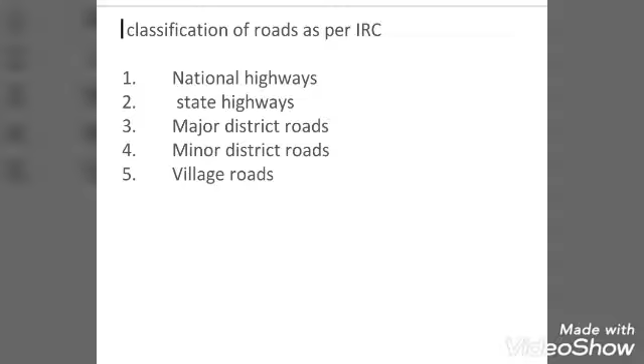Then State Highways SH. State highways of the state link district headquarters and important cities within the state and connect them with national highways or highways of the neighboring state. They are financed by state government, construction and maintenance by roads and buildings department.

So here, 20-year road plans, their targets and achievements. Serial number, category, first 20-year plan, second, third and fourth 20-year plan. The first 20-year plan is 1943 to 61, second 1961 to 81, third 1981 to 2001 and fourth 2001 to 21. According to the Nagpur plan, Bombay plan, Lucknow plan, targets are there for National Highway, State Highway, Major District Roads, rural roads, other district roads, village roads and expressways. So the targets and achievements are given.

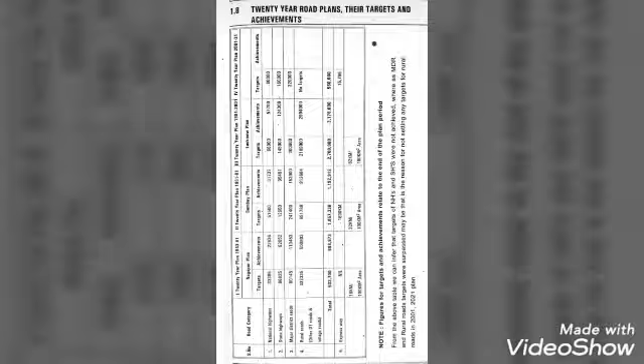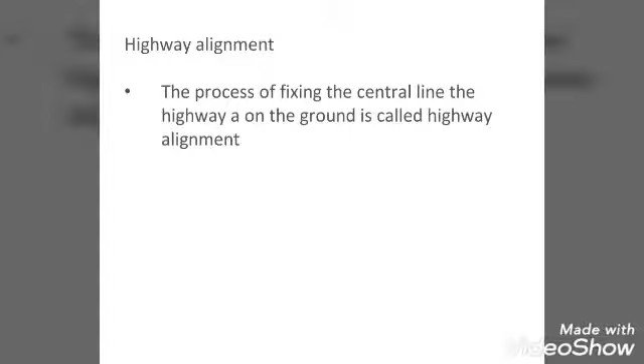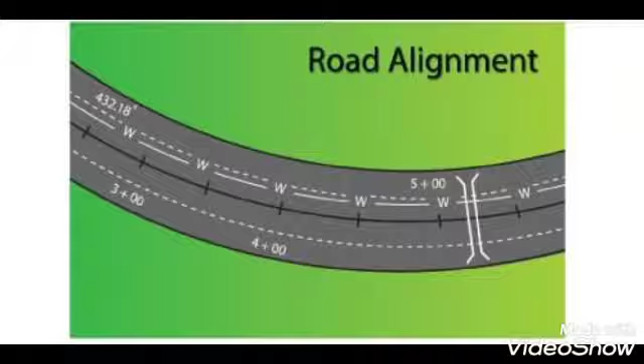Highway alignment: the process of fixing the center line of the highway on the ground is called highway alignment. Alignment of a new road should be done carefully, otherwise there is capital loss, initial and maintenance loss throughout the life of the road. So this image shows the road alignment. The process of fixing the center line of the highway on the ground is called highway alignment.

Now coming to the factors influencing the alignment for a road in plain areas. Number 1, alignment should be as short as possible and as straight as possible between any two villages or towns. It should avoid forest area as far as possible. Earthwork should be minimum. It should pass through easy gradient and smooth curves. The number of cross drainage structures like bridges, culverts should be less. It should avoid agricultural lands and built up areas as acquisition will be costly.

Alignment should pass through high ground, ensuring good natural drainage of rainwater. It should avoid marshy areas, graveyards, religious places and monuments of historical importance. Men and material should be available in the nearby vicinity. It should cross the river at a suitable bridge site. It should connect as many places as possible. It should pass through scenic beauty.

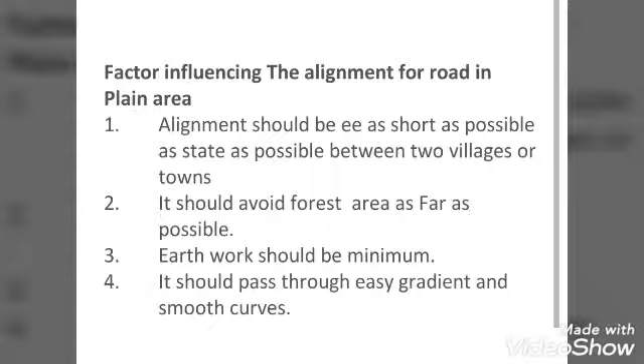Then earthwork should be minimum. It should pass through easy gradient and smooth curves. The number of cross drainage structures like bridges, culverts should be less. It should avoid agricultural lands and built up areas. Then men and material should be available in the nearby vicinity. So these are the factors influencing the alignment of a road in plain areas.

Now coming to the factors influencing the alignment for a road in hilly areas. First one, the alignment should be as short as possible between 2 points. Easy gradient should be provided. Curve and gradient should not be combined. Deep cutting and too many hairpin bends should be avoided. Landslide areas should be avoided, especially in the Himalaya region. Then shady and snow areas should be avoided. Here, steep gradient should be avoided.

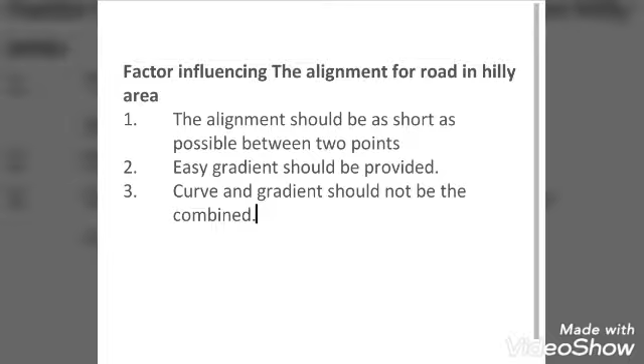So the construction of hilly road may be partly in cutting and partly in embankment. To intercept rainwater from hilly slope, catch water drains are constructed parallel to roadway. Water from catch water drains flows by gravity up to cross drainage structures like culverts, bridges, etc., and passes below it to cross the roads.

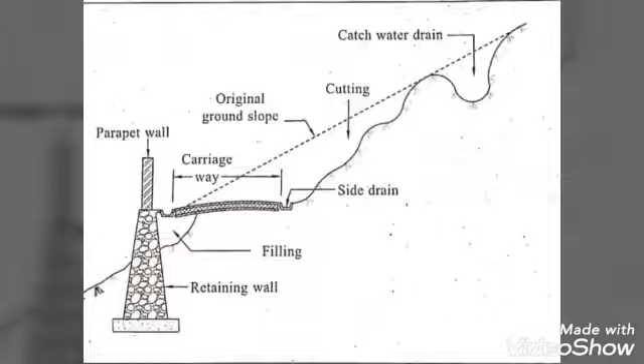The road cross section of hilly road partly in cutting and partially in filling. This image shows the cutting and filling of a hilly road. So here water from catch water drain flows by gravity. We are not using here any pressure or any mechanisms. Only by gravity flow it is there up to cross drainage structures, especially like culverts, bridges, and passes below it to cross the road.

Then next, coming to the highway surveys. Before alignment, the engineer in charge has to select 2 or 3 routes for connecting 2 points and finally select the most economical and short route. For this, engineering surveys will have to be carried out. So, the 3 stages of engineering surveys are reconnaissance survey, including map study, preliminary survey, and final location survey, or detailed survey.

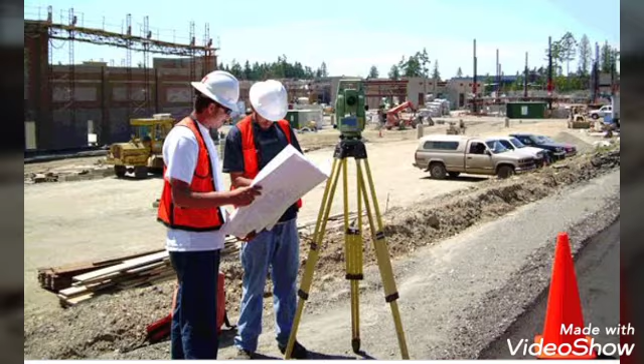Here, coming to the first survey, reconnaissance survey: initially collect topographical sheets of 15 or 30 meters contour intervals. So we are seeing that survey is going on. By seeing this image, we should start the survey from Survey of India. The rough idea of alternate routes are marked on the topo sheet. It is a rough and rapid survey.

During this survey, the field party inspects the alternate routes personally with simple instruments like Abney level, clinometer, barometer, and collects the information regarding nature of soil, availability of men and material, river streams, slopes of ground. All the information which is not available on the map is collected and noted down.

During collection of data, the alignment proposed on the topo sheet may be altered or even changed completely because of change of river course, change of contour level, etc. As a result of survey, 2 or 3 alternative routes are selected for study.

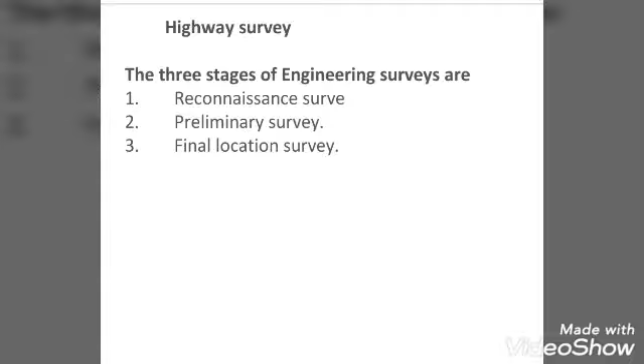Then coming to the preliminary survey. During preliminary survey, levels are taken at different cross sections along the route, features are marked and contour plans are prepared. For identification and classification of soil, samples are collected from a depth of 1 to 3 meters with the help of a post hole auger.

From preliminary survey, one should get sufficient data by using instruments like theodolite, dumpy level, compass, tacheometer, total station to calculate the detailed cost of construction of highway for alternate routes. One should decide the best route from alternate routes, which will be the most economical. Depending upon the time available, one should decide the type of survey, namely land survey or aerial survey.

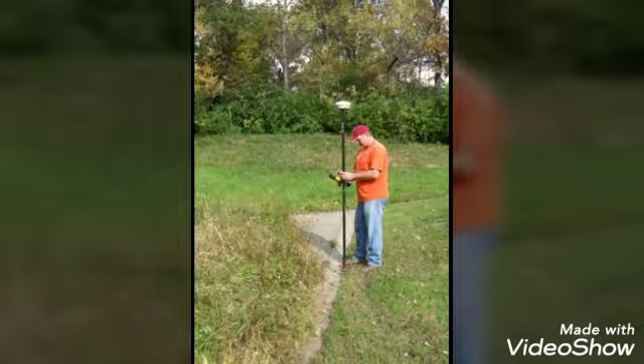During the survey, the information collected is ground level, different buildings along alignment, position of quarries, water resources and drainage facilities available, soil and swamp particulars, etc.

Objectives: to select the best route from the alternative routes proposed in the survey. To finalize the best alignment considering all factors and determining the center line to be followed. To estimate the quantity of earthwork and other items to work out the cost of alternate proposals. To collect information required which is missing in survey for making estimation of the proposed route.

Now, coming to the final location survey. During this survey, for the most economical route, the center line is fixed on the ground and pegs are laid at required intervals and high-precision survey instruments are used. Sufficient number of benchmarks are established along the route. Drawings are prepared, such as longitudinal section and cross section, by using levels and curves. Gradients are fixed. Estimates such as analysis of rates.

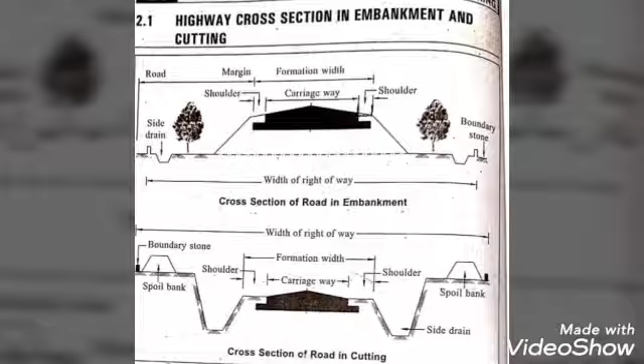So coming to the cross section of road in cutting. In cutting, we are seeing boundary stones, spoil banks, then shoulders, then carriageway, formation width, shoulders, then side drains.

Coming to the component parts of a road structure. So here subgrade, subbase, base course, wearing course. Subgrade is the top of the ground on which the foundation rests. If the subgrade selected is at a higher level, it leads to natural drainage. The top of the subgrade is 600 mm above the HFL of that area.

Coming to the functions: to support the road structure, to distribute the load over a large area, to form a bed for the road at the design level. Subbase is the layer of locally available material laid over the subgrade. Material used may be sand, gravel, rubble, etc. If the subgrade and its drainage is good, it may be omitted.

Functions of the subbase: to protect the subgrade from rain, to improve the drainage, to reduce the cost of the pavement. Coming to the base course, it is the layer between sub-base and wearing coat. It is made of good material like hard broken granite, metal, and well compacted. It is an important structural component and should be strong enough to bear the traffic load.

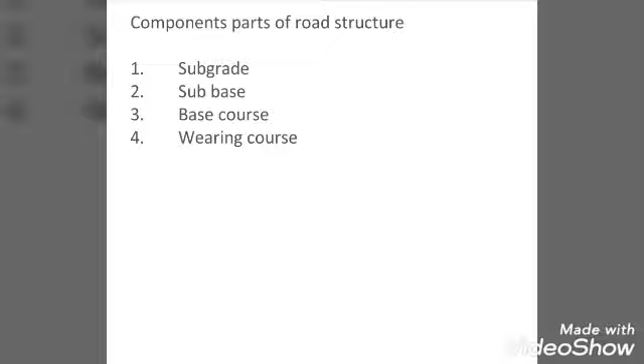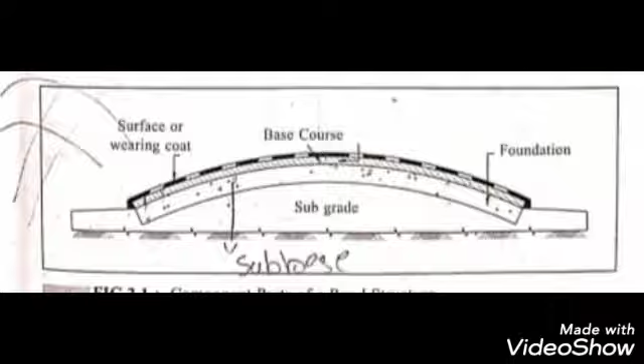So this picture shows the component parts of a road structure. Here we are seeing subgrade, then foundation, then base course, surface or wearing coat. Here subgrade and foundation and base course layer and surface or wearing coat. So here the subgrade is the top of the ground on which the foundation rests.

Now coming to the road geometrics. First one is width of pavement, or you can say carriageway, shoulders, then formation width, then right of way. We have already discussed these in the road structure.

So coming to the road geometrics, the width of pavement or carriageway depends on the width of traffic lane and number of lanes. The carriageway intended for a single line of traffic movement may be called a traffic lane. Width of lane is determined by considering maximum width of vehicle and minimum clearance required for safety.

As per IRC, the maximum width of vehicle considered is 2.44 meters. The lane width considered is 3.8 meters for single lane. If the pavement has 2 or more lanes, a width of 3.5 meters per lane is considered sufficient. Now, IRC recommended the width of carriageway.

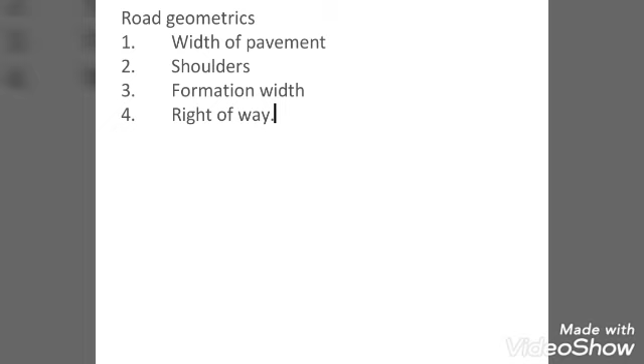Highway alignment. The process of fixing the center line of the highway on the ground is called highway alignment. Alignment of a new road should be done carefully, otherwise there is capital loss, initial and maintenance loss throughout the life of the road. So this image shows the road alignment. The process of fixing the center line of the highway on the ground is called highway alignment.

Now coming to the factors influencing the alignment for a road in plain areas. Number 1, alignment should be as short as possible and as straight as possible between any two villages or towns. It should avoid forest area as far as...